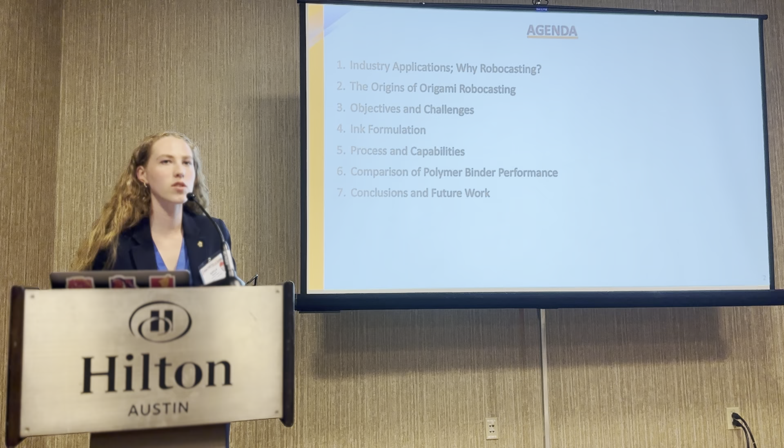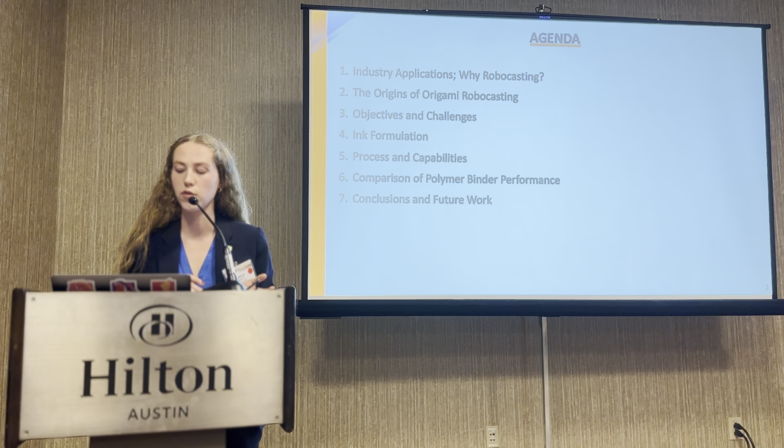So we'll start with just a little bit of the industry applications of this project. We'll look at why robocasting specifically for the origami application. And then we'll talk a little bit about the origins of this origami robocasting, the precursors to the method. Then we'll look at the objectives and challenges for this project and our specific ink formulation, and moving on to the printing process, what we've been able to achieve, and the meat of our quantitative results is going to be the comparison between two different polymer binders in the ink. Then we'll conclude and see some more areas to explore.

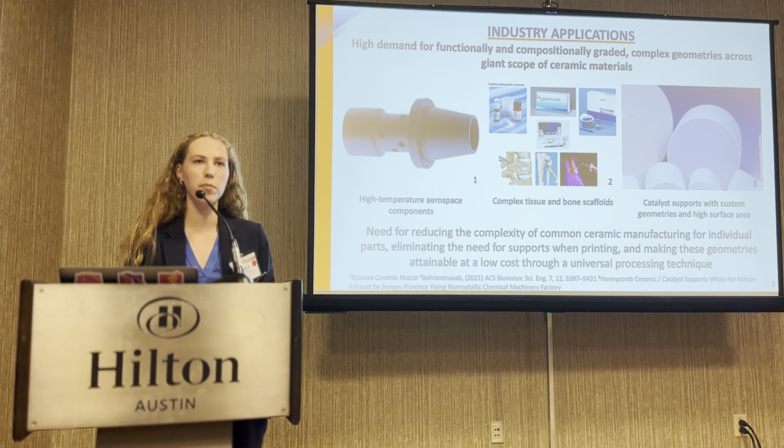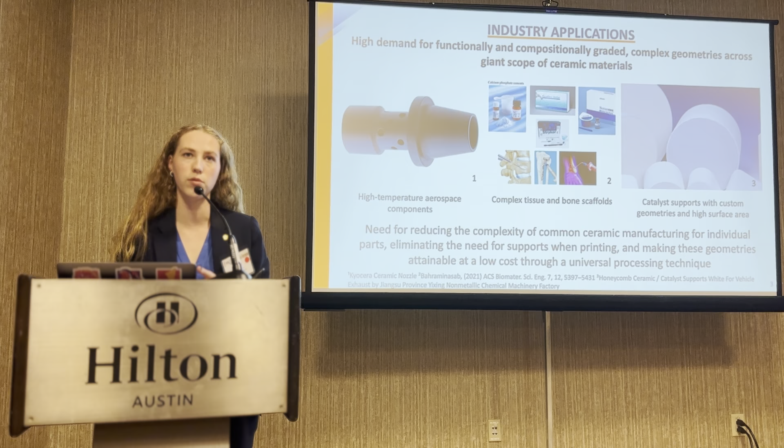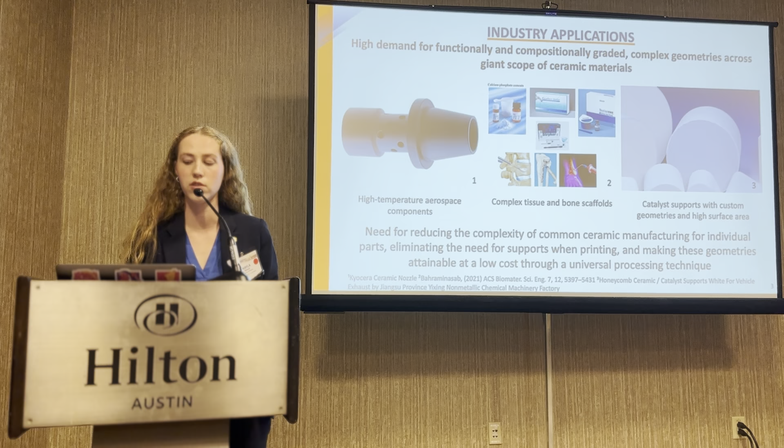The underlying application of this work is any industry that requires complex ceramic geometries, such as high temperature aerospace components, there's a nozzle there, complex tissue and bone scaffolds, or catalyst supports that require precise geometries and high surface area. So there's this need for functionally and compositionally graded components, which is where robocasting can be very useful. And the current best manufacturing methods for these are mold casting, which can't create hollow components, and it also isn't very suited for that rapid prototyping or higher density manufacturing.

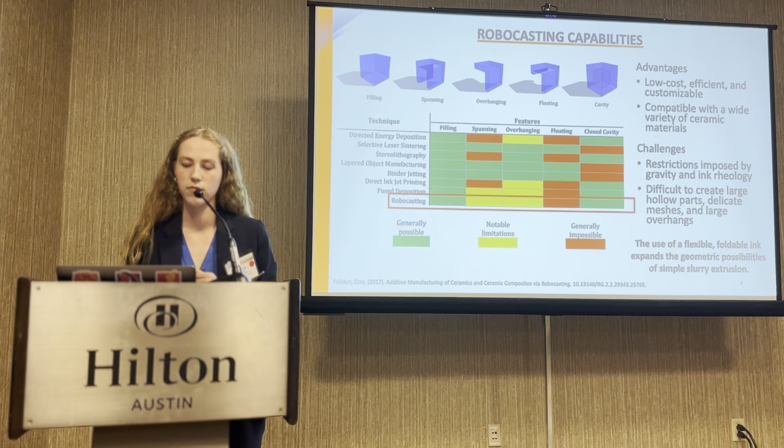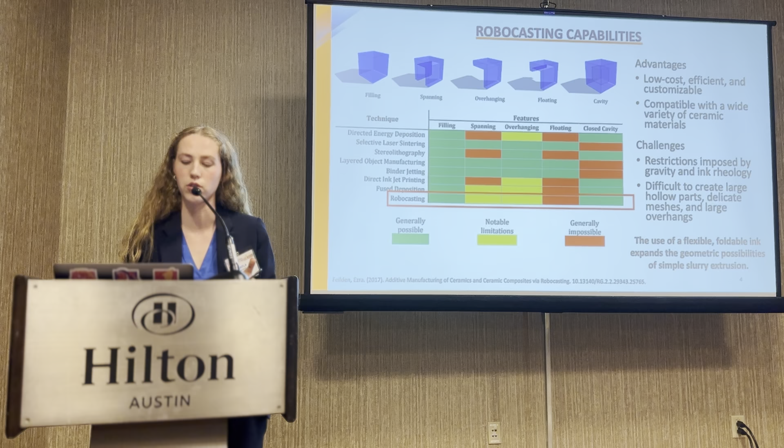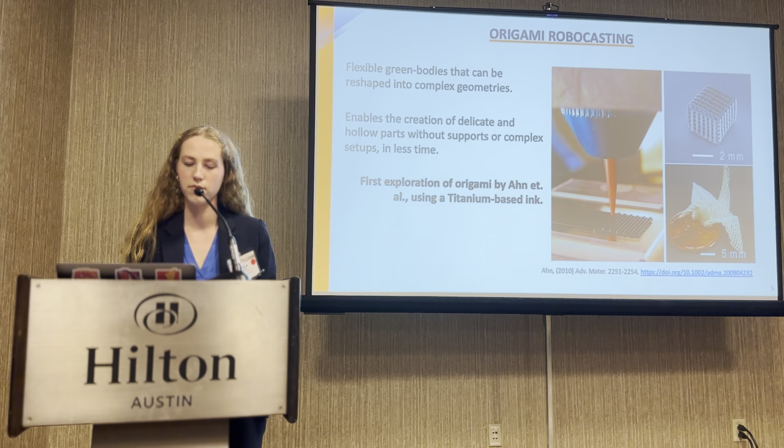So why robocasting? It's super cost efficient, it's really accessible, it doesn't require the same tooling that a mold would, and it can create those functionally and compositionally graded structures with the layers. And the use of the origami flexible foldable ink expands even further those geometric possibilities in the slurry extrusion. The origins of the method were Ahn. They used a titanium-based ink, which is an ancestor of our formulation, and created many of these small-scale parts like the cube and the crane that you can see here.

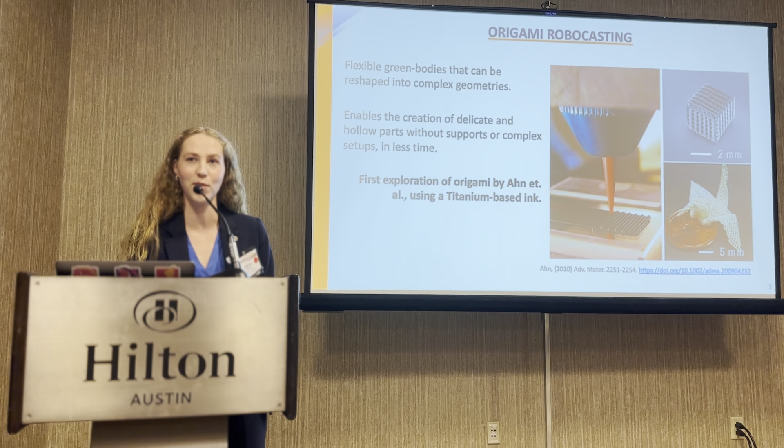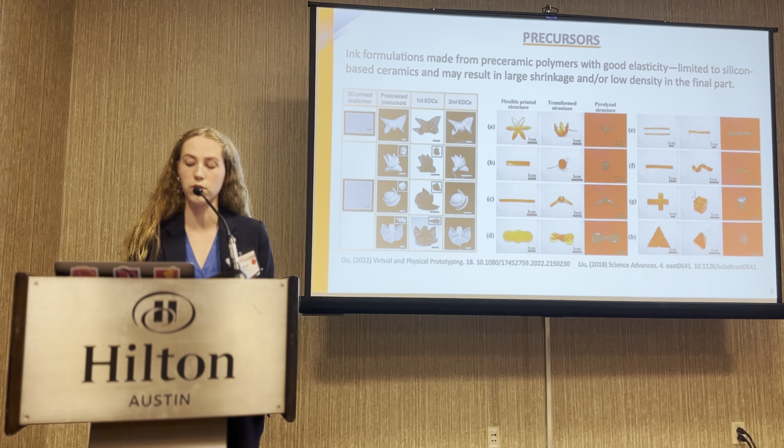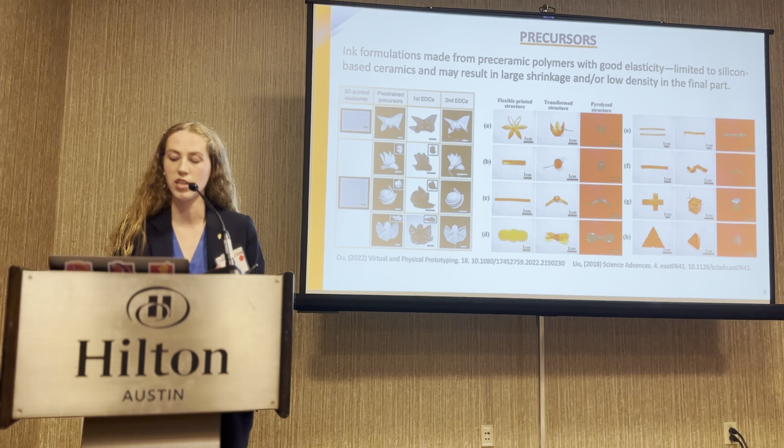And the expansion of this into the field of ceramic parts generally focused on polymer-derived ceramics, which need fillers to reduce the cracks and increase the density, and they're also very limited in the material scope. They're generally only silicon-based components. They also use a pyrolysis process that generally downgrades their mechanical performance. So here on the right, you can also see that the PDC that they used is limited in its shape memory and needed a wire in order to support it during the sintering process.

For our projects, the objectives on the macro scale increase geometric possibilities for this method. I used Balderson's novel ink formulation and applied it to origami robocasting, and then I compared two different polymer binders, a polystyrene and a polyethylene oxide, at different volume percents. Then I just wanted to demonstrate the geometric possibilities while working with the challenges of fine-tuning that ink formulation, getting it perfect for printing and manipulation, and also standardizing these processing and printing steps to be able to scale it up for identical prints. Finally, we wanted to optimize the properties of the finished components, properties like density.

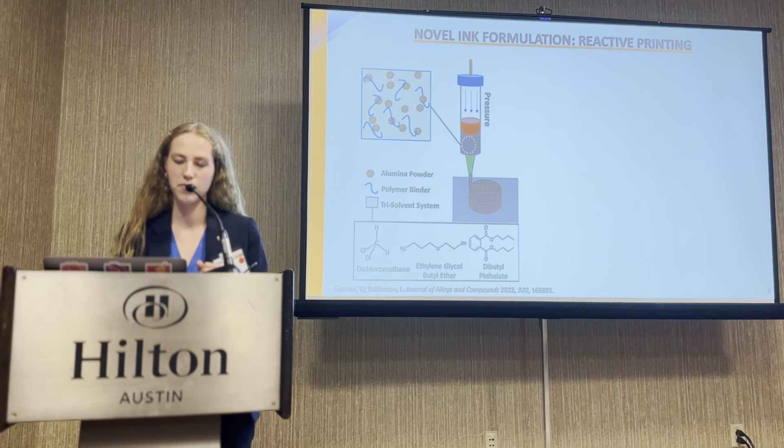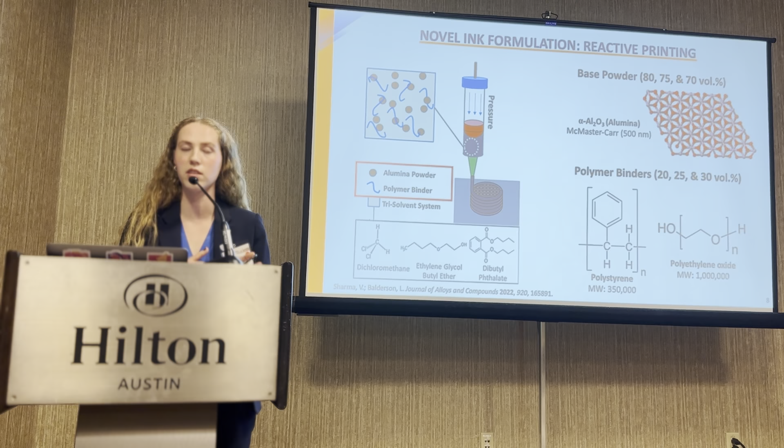So the ink formulation. The two main components are the ceramic powder and the polymer binder. We experimented with a base powder. We started with alumina because it's super common in literature and it's a great stepping off point. And we chose the ratios of 80, 75, and 70 volume percent in order to get the maximum density possible in our sintered prints without limiting the performance of the ink. As you increase the volume percentage of the alumina powder, the ink becomes crumblier and it's harder to extrude from the nozzle.

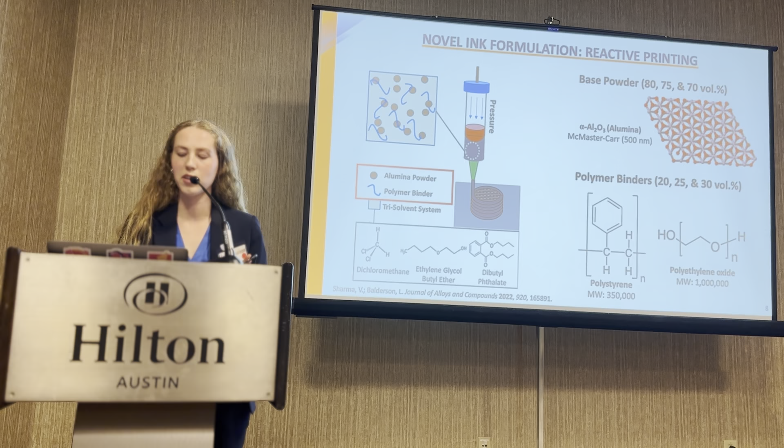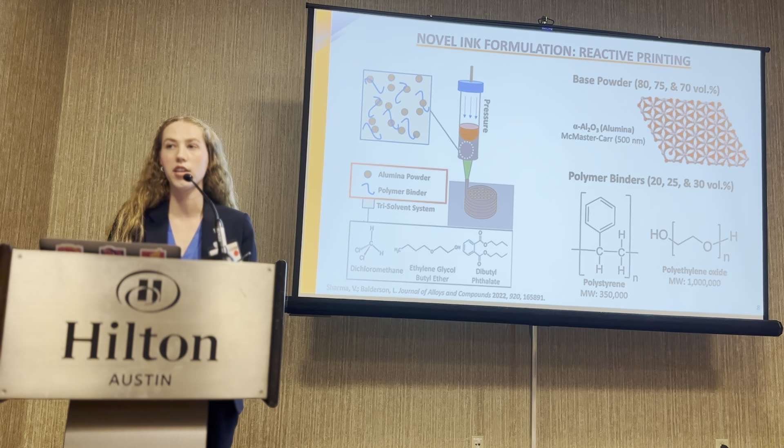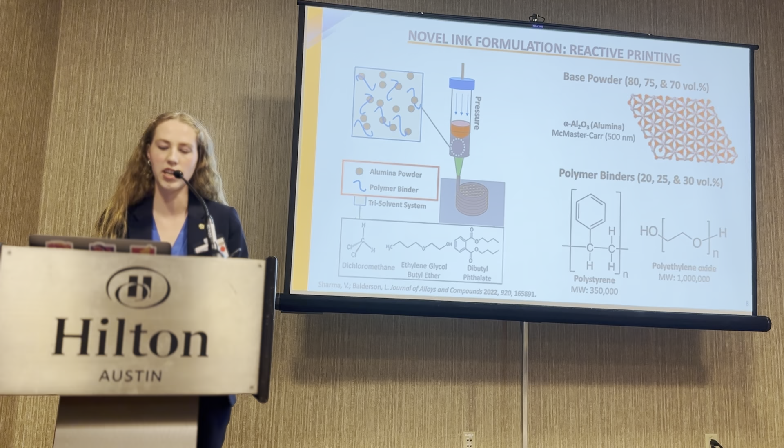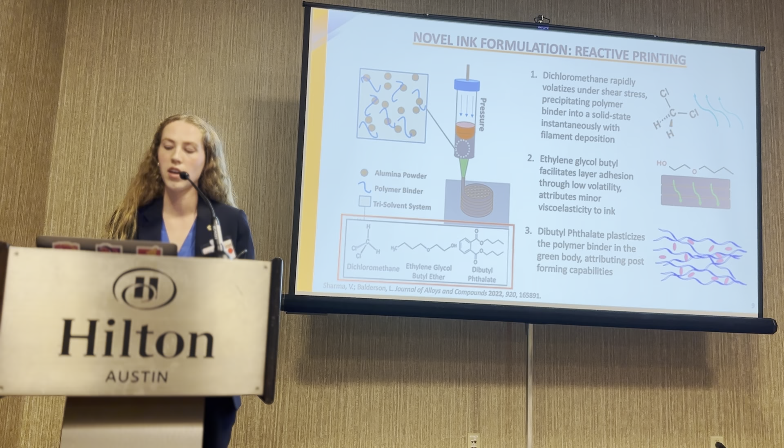Then the polymer binders, as mentioned before, polystyrene or polyethylene oxide, they act like the clay or putty to hold together the ink. They create the ink's shear thinning properties. They have high yield stress, which makes it act more like a solid when printing, and it has a higher storage modulus. They also provide more of that shape support when sintering. And the trisolvent system, the third component of the ink, has dichloromethane to volatilize under shear stress and allow that ink to set as it prints, the EGBE to make the ink self-healing and adhere the layers, and the DBP to enable that folding behavior.

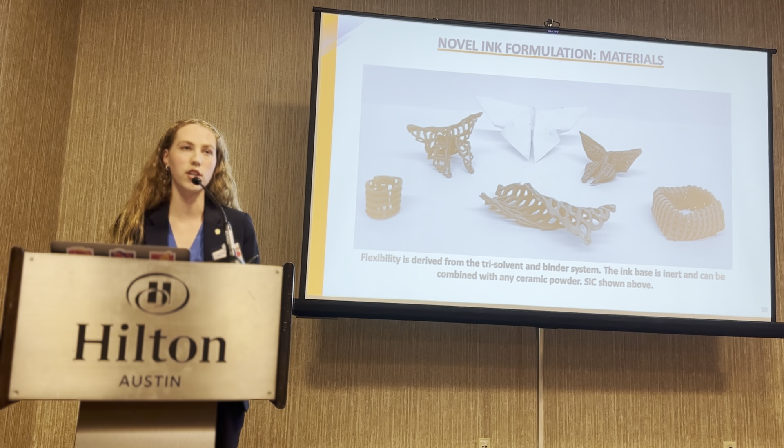Another great component of the same formulation is the ability to use multiple materials. As shown in the black here is silicon carbide in addition to the alumina. Because the ink base is inert, it can be combined with any ceramic powder. Other notable features are its sustainability. This ink is recyclable, so any unused ink or failed prints can be redissolved with dichloromethane and reused for future prints.

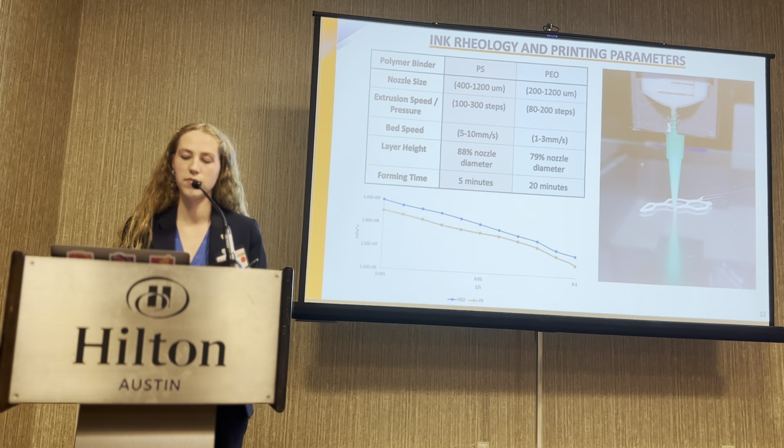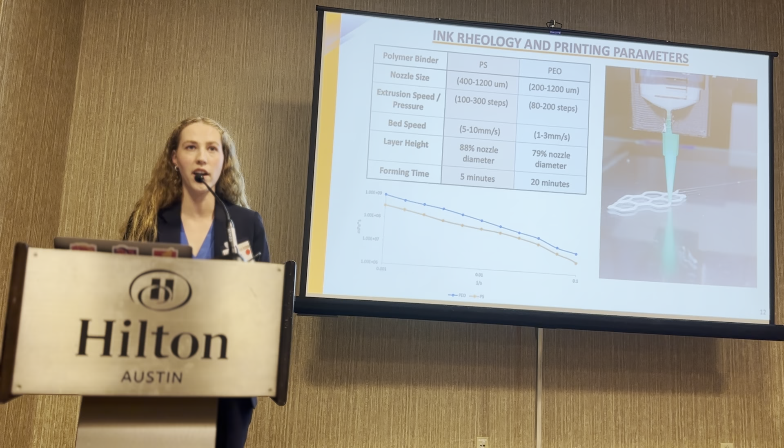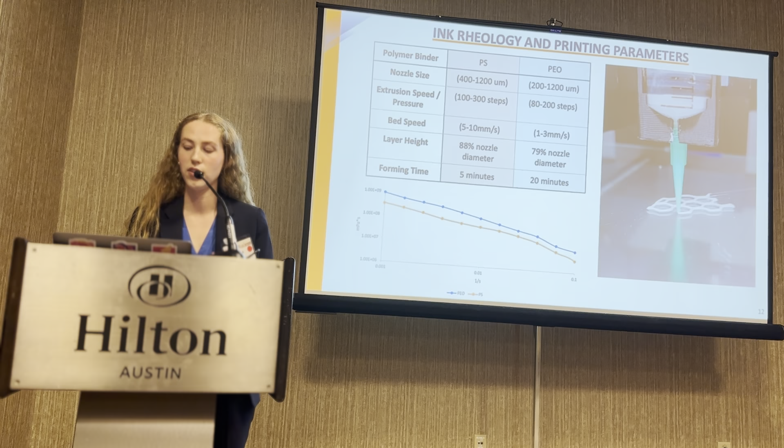Now getting into the printing process, as we went about printing and optimizing the machine settings, we arrived at these in the table here, and our conclusions in general were that the PEO binder is thicker and has greater viscosity, which led to it requiring slower printing speeds. However, the post-forming time is one of the most important capabilities, and the polystyrene becomes much more brittle more quickly, so that PEO is much better for shaping post-print.

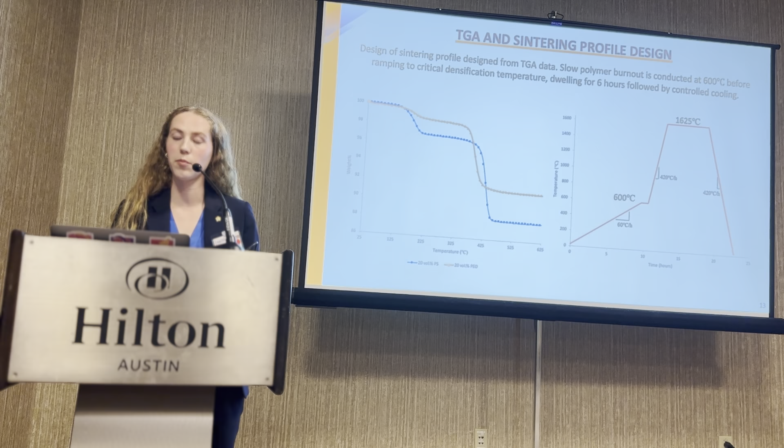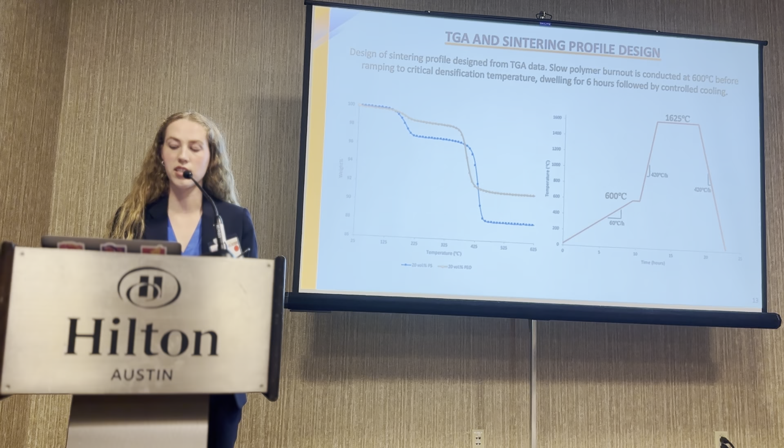We use thermogravimetric analysis to design our sintering profile, and by observing when the polymer burnout occurs, we designed this burnout profile. First step is the polymer burnout at 600 degrees Celsius. It removes all of the polymer and it leaves behind the carbon structure that supports the form during sintering. The second at 1625 is densification, and then we conclude with controlled cooling.

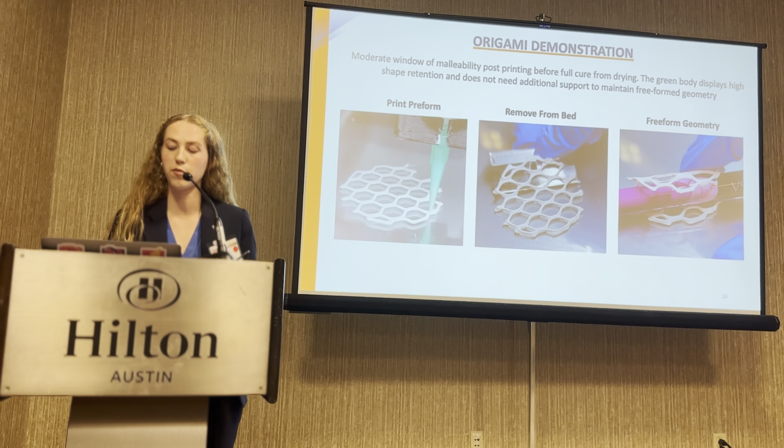After the dissolution, processing, syringe loading, and printing, we get into the origami process, which starts with that preformed flat shape. Then we remove it from bed after letting it sit to partially set, and finally we shape it with the aid of hands or other sort of shape molds.

This ink is self-healing, which means you can press it together after print to join with itself, but depending on the set time, you may add additional ink in order to completely join those boundaries. And the green body doesn't need aids to maintain its shape either before or after sintering. So once you've shaped it, it holds.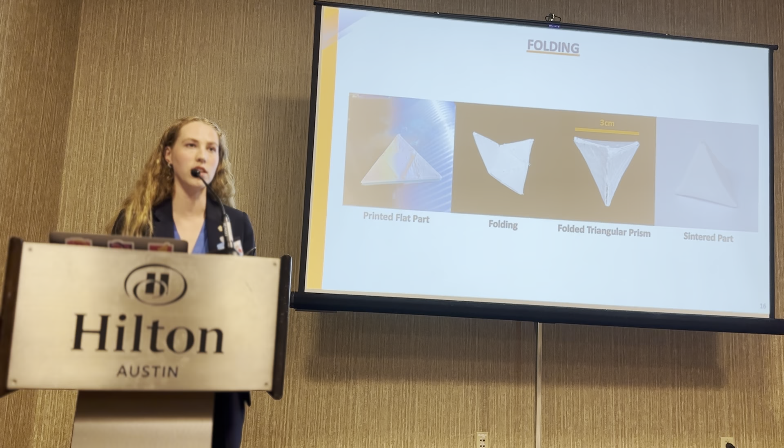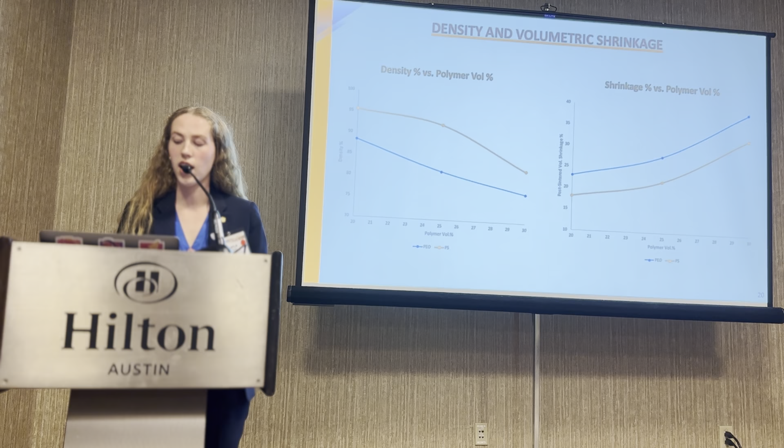So now let's get into more of a data-driven comparison of the polymer binder performances. As you can see, as the polymer loading increases, the density of the final part decreases and the shrinkage increases. Polystyrene had the highest density at 95% alumina, but PEO had a highest density at 89%. The shrinkage for both binders had a very similar trend, but there was slightly smaller shrinkage from the polystyrene.

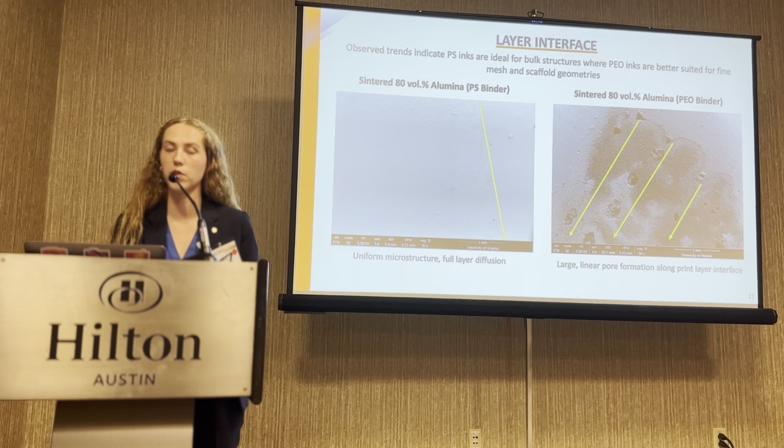And on a more microstructure level, from the layer interface, we observed that the polystyrene binder is essentially indistinguishable with the layer boundaries as complete diffusion in the sintered part. PEO, being the bigger polymer, keeps solvents from diffusing through the layers effectively, so it creates more of those bubbles on the layer boundaries. Those fusing issues occur more in bulk structures, which is why we recommended polystyrene more for bulk parts. However, we're doing additional work to mitigate those fusing issues in the PEO with the addition of a plasticizer.

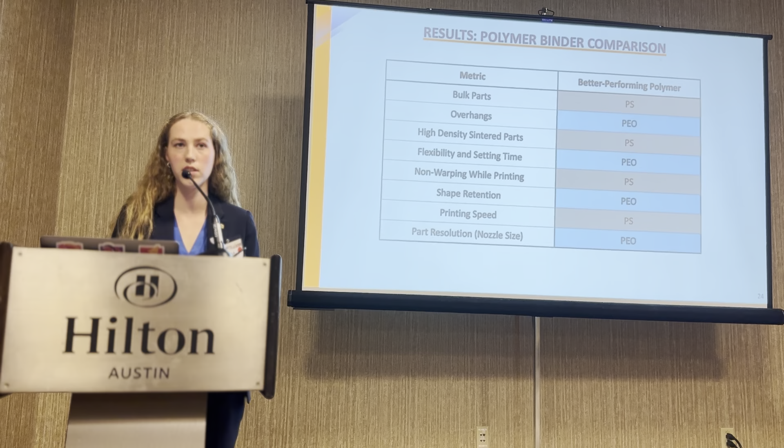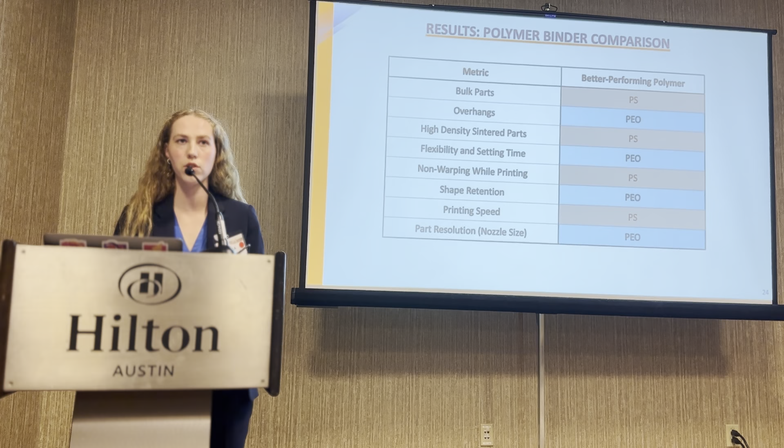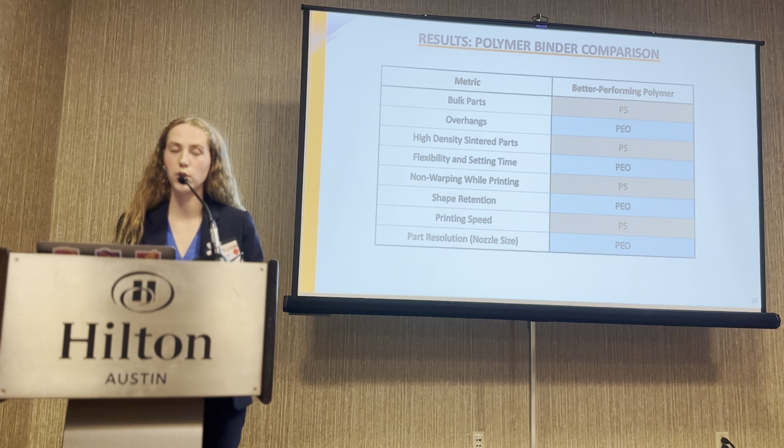So to recap, for the differences between our polystyrene and polyethylene oxide, polystyrene is much more preferable for bulk parts and high density parts, but the PEO is preferable for shaping parts, overhangs, and shape retention when sintering, which are some crucial elements of this origami method. PEO burns out into that carbon structure. With more carbon, it supports the shape more during sintering, and PEO has a higher storage modulus, which is better able to create those spans and overhangs. We're experimenting with the addition of PEG to PEO in order to reduce the microstructure and other issues that the polystyrene is stronger in.

So in conclusion, our sintered alumina prints exhibited high density and moderate shrinkage without any issues such as cracking experienced by previous literature, and it maintained those manipulated green body shapes, which opens lots of potential for more advanced geometries in the field of ceramic robocasting. In the future, we're looking at further standardizing those ink and printing processes, expanding the compatible materials, testing those green bodies and the sintered bodies for mechanical properties, and finally, looking at process scaling for larger components and faster printing of components.

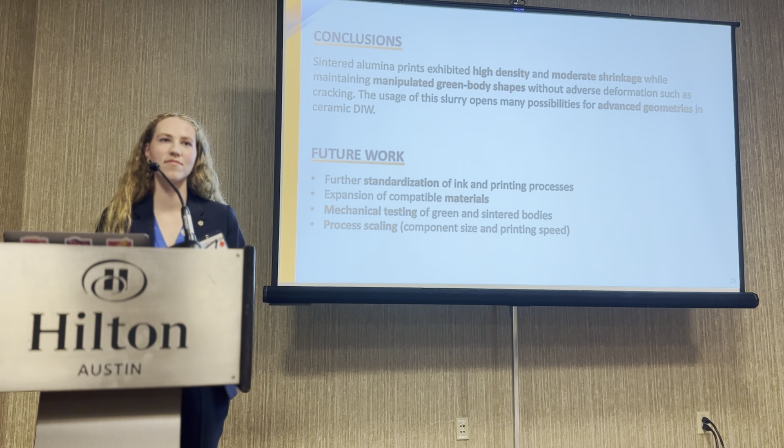You got time for questions? You got your hand up, Mr. Perry. I thought that was a very interesting presentation. I like it. Thank you.

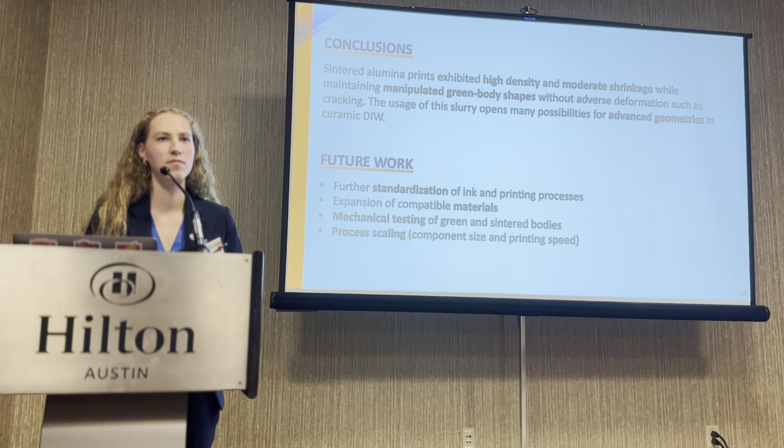I'm wondering, so you are basically printing this 2D shape and then you change it to 3D. Yes. So how can it hold its shape after you change it to 3D? Right, so you're folding it either with your hands or a mold, and the volatilization of the dichloromethane enables the ink to set. So it hardens, where initially it was more of a liquid coming out of the extrusion, and then it becomes a solid. Okay. Yeah.

Could you tell us about the chemical that enables self-healing? How that works and enables it to self-heal?

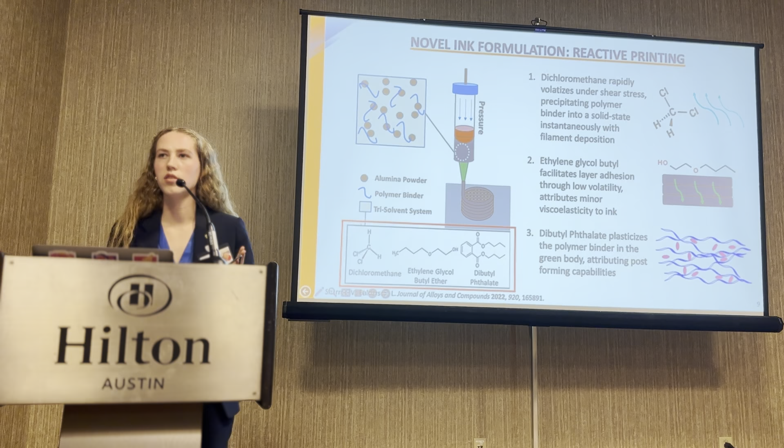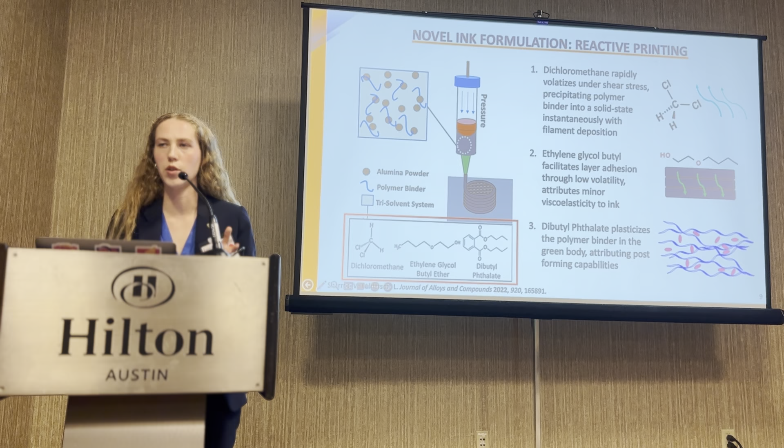So the DBP, the dibutyl phthalate, is a plasticizer, and the EGBE has a low volatility, which means that between those layers, it keeps it from setting too quickly. So you have the dichloromethane, which allows it to set in order to maintain that shape. But the EGBE tempers it a bit and allows the layer boundaries to fuse into each other before fully setting.

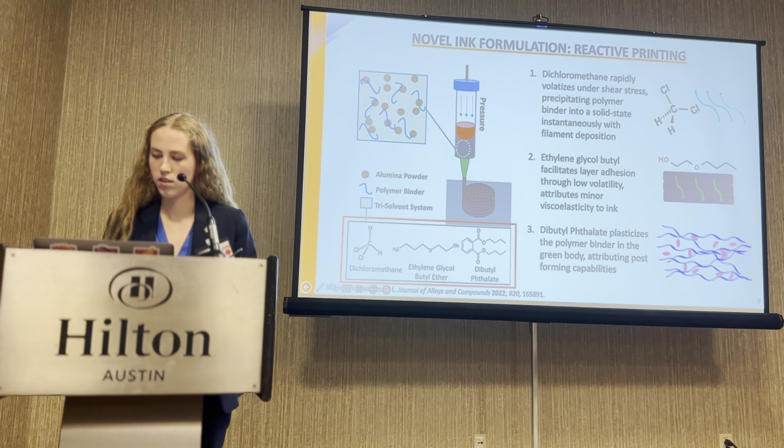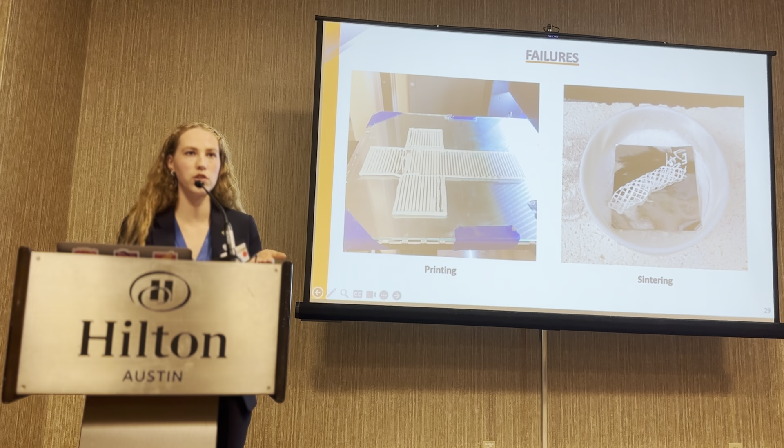My first question is, so you use this polymer from 1% up to 30%, correct? Yes. Okay. Another question: when you show this lattice cube, how can you change it from 2D to a lattice cube? I actually have a supplementary slide on this. This is an example of a failed print, but you can see the shape net there. You print the flat version of a 3D shape, and then you fold the sides up. All right, okay. Thank you.

Were you controlling the humidity in the environment when you were printing? No. Okay.

So you mentioned going for the center of mass on the bottom of the crucible during sintering. Is that because you see some sort of structural collapse during the sintering process? Yeah, so one of our challenges when creating these parts that survive sintering is to balance the components in the ink recipe. When you have a thinner ink, especially an under-processed ink, it's more likely to collapse. And when you haven't let the ink set long enough after printing and forming before sintering, it tends to have more of that deformation.

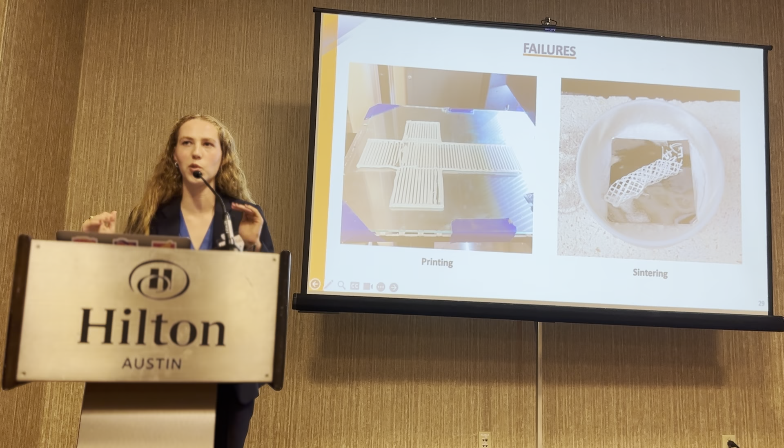So we were balancing multiple components of the process, and one of the ways we found to mitigate it, if we had forgotten to let it sit long enough or had under-processed the ink, was to sinter it with the center of mass lower.

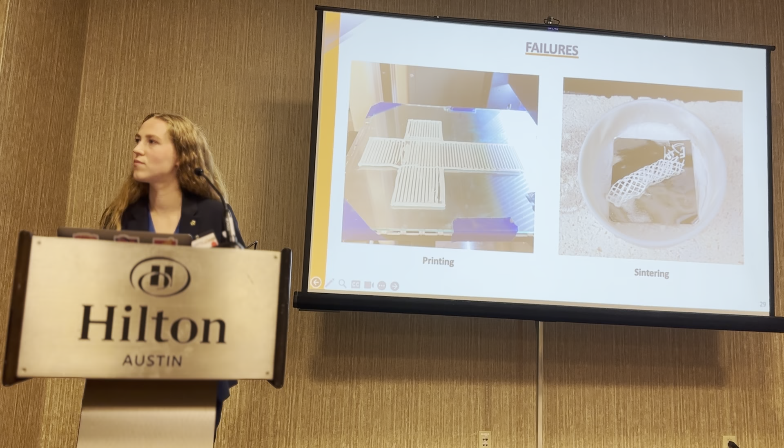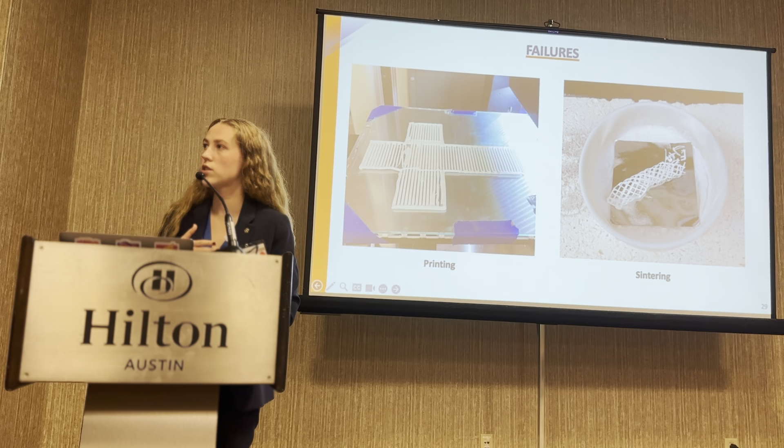I have a related question. I'm assuming it's gravity pulling down that's causing it to sag, and that's what you're trying to mitigate. Yeah. Have you looked at supporting the sample with some kind of external mold so that it wouldn't collapse during that drying or sintering process? Yeah, absolutely. This is what a lot of our precursors did. They sintered it with a mold, using the ink in the mold.

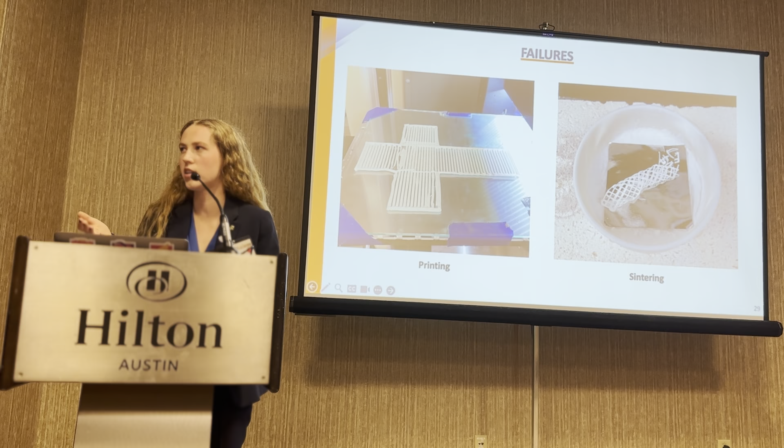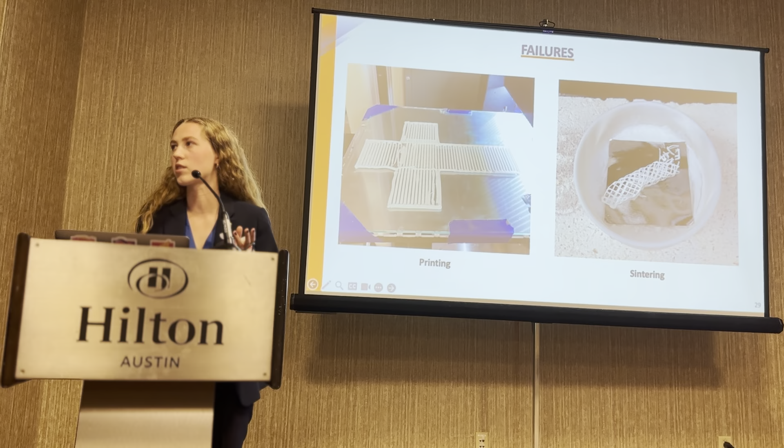One of the great things about this ink is that it has a little of that ability to break free from mold dependence. However, you can see on this slide, titanium foil or platinum foil can be used to support the part without fusing during sintering, so you could easily make a flexible structure out of foil. Yeah, sort of temporary.

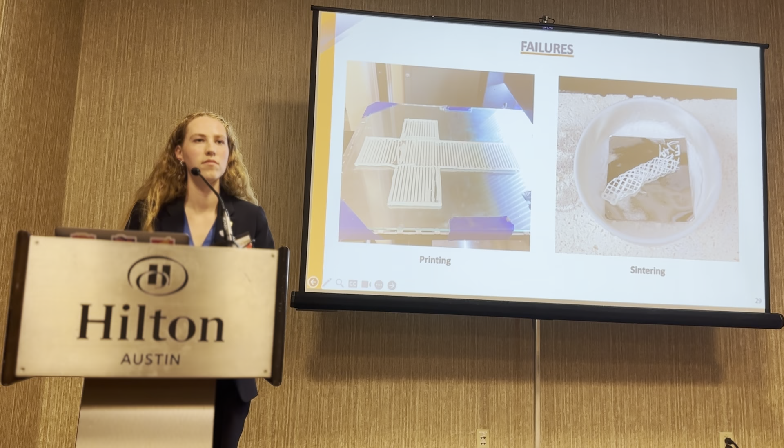Sorry, one more question. My understanding is robocasting uses an aqueous base with a very small percentage of binder, but your binder is up to 30%. So can you call that robocasting? I mean, it's getting into semantics, really. It's an extrusion of a slurry-based ceramic. Yeah.

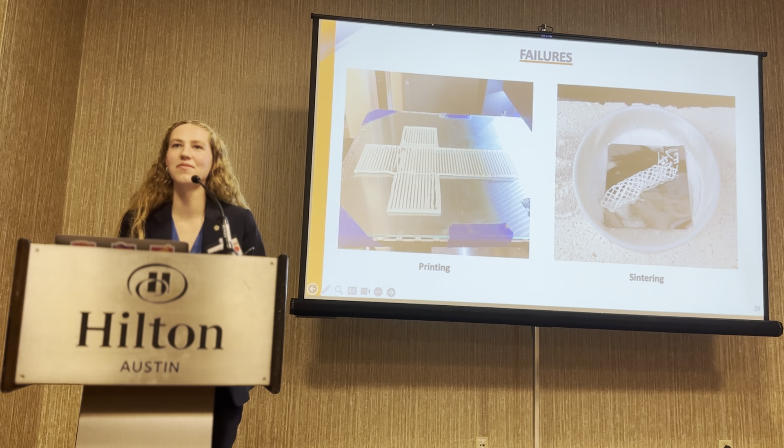There's a few more questions, you wanna keep going? Sure. All right, we've got time, but don't wanna torture you either.

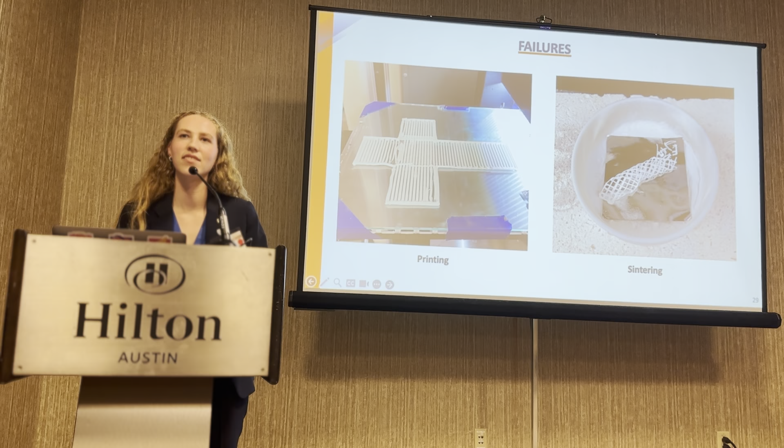Two quick questions. What happens to the carbon in the burnout? So the carbon during sintering creates that lattice structure, which enables it to maintain the shape without external support. If your question is whether it's just an alumina and carbon structure after sintering, the carbon does eventually burn out. Carbon monoxide or carbon dioxide or something.

There was a slide where you highlighted the relative setting time. How long does it take to set? For the polystyrene, about 5 minutes to set before it cracks if you try to bend it. For the PEO, about 20 minutes. But, to your comment about the moisture content in the room, we've seen some of the polystyrene prints be flexible even a day after.

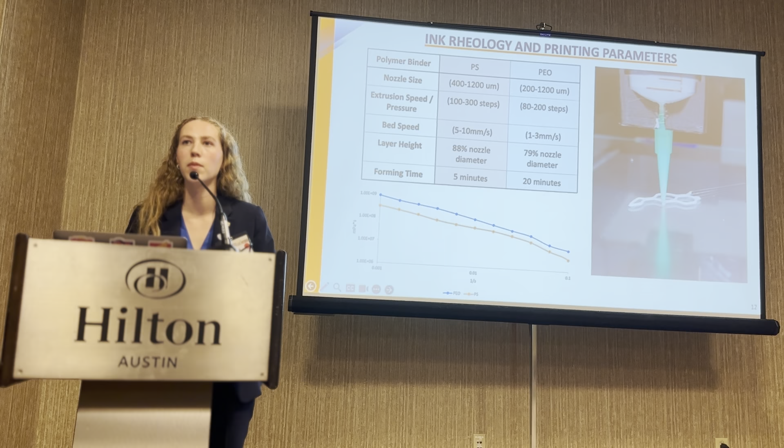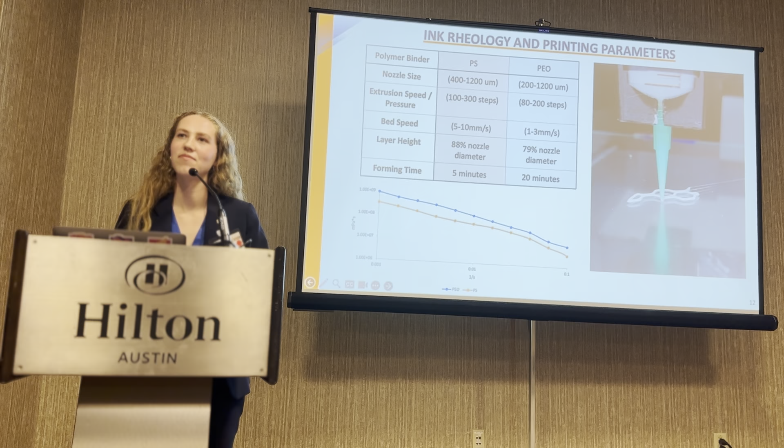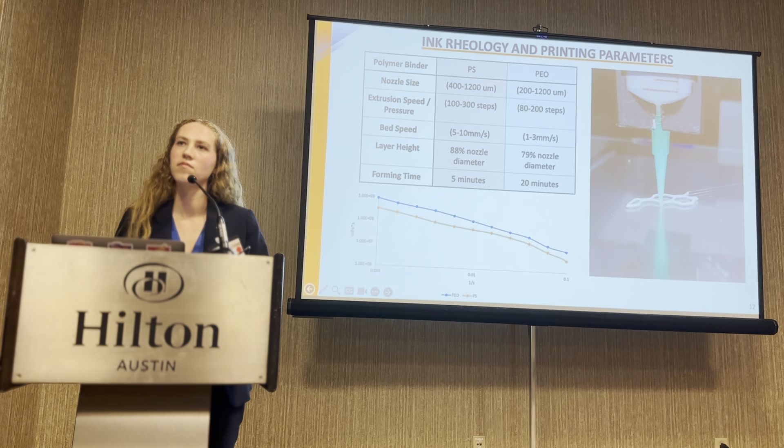Very good. One last question. Go ahead, we got time. This is regarding what he said. Have you made any attempts to do characterization as the material cures, dries, or sinters, and watch what changes? No, but that would absolutely be a great future application.